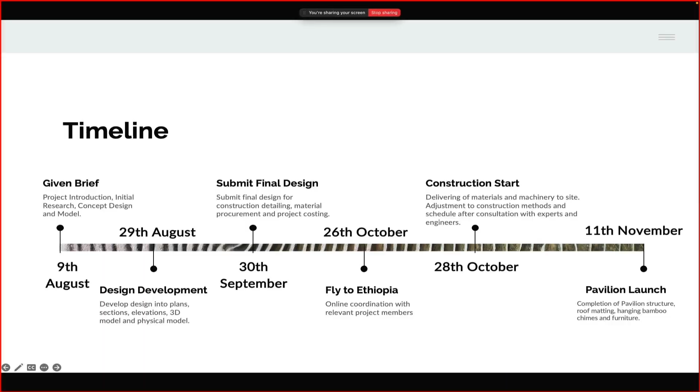I will now walk you through the timeline. It all begins on August 9, 2024, when we received the brief from Mian. Honestly, it felt like someone handed us a hot potato on a very hot summer, if anyone can remember summer of last year. Fast forward to the end of September, the design was finalized, and by October 26 we were on a plane to Ethiopia.

Finally, on November 11, our pavilion proudly stood tall, woven with ropes, bamboo, and the power of friendship. Not really, it's more about the beauty of collaborations. We did enjoy the hot potato though.

In summary, we took 1 month of design development, 1 month of technical designs, 1 month of procurement, and 2 weeks of construction.

Now let's take a moment to travel through the hills of Addis Ababa, Ethiopia, mentally of course - I know it's summer. Welcome to Entoto Park, a park with stunning natural beauty, cultural richness, and now, thanks to a collaboration between two countries, a new pavilion that celebrates connection, local craft, culture, and creativity stands on its ground.

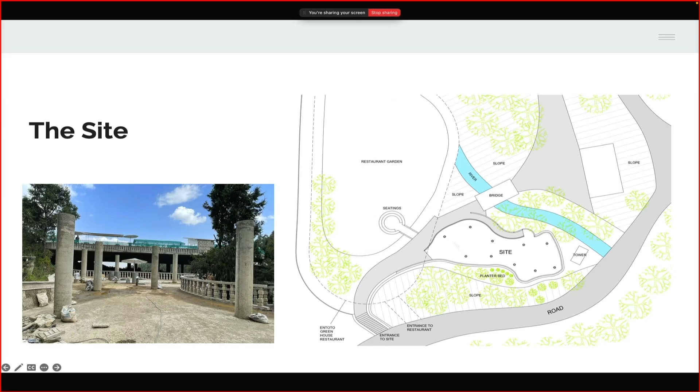Throughout the design stages, technical detailing, procurement, and construction, the 6 students from EIABC were our eyes, ears, and mouth for this project. They were the bridge between us and the local craftsmen in Ethiopia. Now I'll let Austin talk on the designing stages of our project.

Hi. So, moving on to the design stage of the project, we were presented with a unique challenge. While we had freedom to almost design anything, there was one strict condition: we had to build entirely out of natural materials. This immediately shaped every design decision from the start.

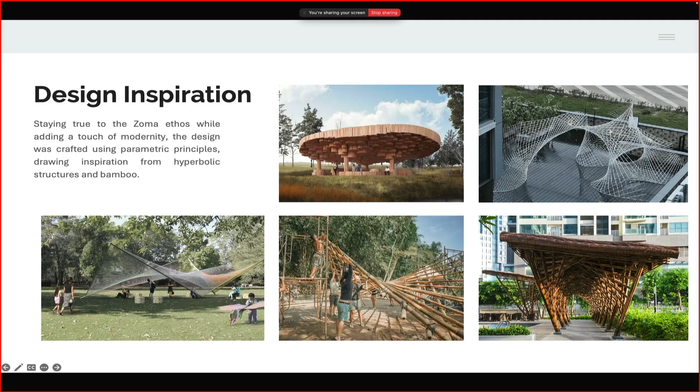At the heart of this project was the desire to create something that could merge Zoma's ethos of craft, community, and material honesty with a contemporary design. We wanted a design that would represent fusion, an amalgamation of modern architectural methods with Ethiopian vernacularism. This led us directly to the material of our choice: bamboo.

Why bamboo? Because it's highly versatile. It's linear yet flexible. It has excellent tensile strength. It's lightweight, rapidly renewable, and naturally sustainable. Perhaps more importantly, Ethiopia is one of the world's largest producers of bamboo. By using bamboo, we not only responded to its structural advantages, but also highlighted Ethiopia's emerging bamboo industry, bringing attention to its local and global potential.

Moving on to our concept design. With bamboo as our primary material, we needed a form that could fully exploit its natural strength while also offering spatial richness. We turned to parametric design using Grasshopper to explore a wide range of possibilities. Parametric tools allowed us to rapidly generate and test complex geometries, adjusting parameters like curvature, span, and beam orientation.

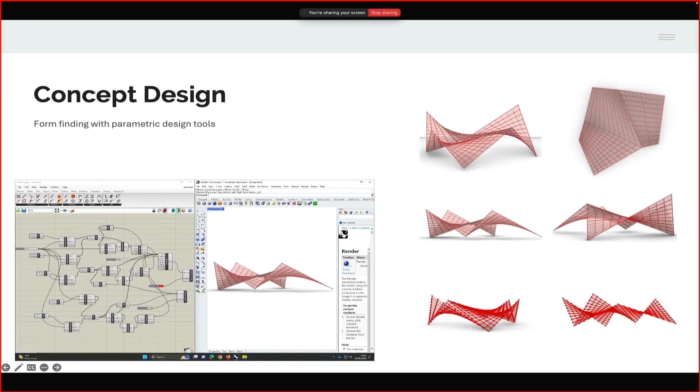We were particularly drawn to hyperbolic paraboloid geometries. The reason for this is simple: hyperbolic surfaces allow you to create flowing organic curves using purely straight linear members, perfectly suited for the structural nature of the bamboo. At the same time, these geometries offered inherent structural efficiency. Loads could be distributed smoothly across the members. Openings could vary in scale and proportion, allowing light and air to filter through the pavilion. In short, we could create an immersive, expressive, and visually dynamic structure while maintaining simplicity in fabrication.

Of course, design on screen is very different from design in reality. We spent several weeks iterating, bouncing between digital simulation and physical models. Building prototypes became a critical part of testing how these geometries would have been transformed into actual materials. These digital models gave us precision and control over form, but the physical tests immediately revealed material realities.

In Grasshopper, every member is perfectly straight, every joint perfectly aligned. In reality, bamboo is far less predictable. No two poles are identical. There are always variations in diameter, curvature, straightness, and even texture. And while this variability gives bamboo its character, it also demands flexibility in construction. So even as we refined our digital models, we knew from the beginning the model would serve only as a guiding framework, but not a rigid set of instructions.

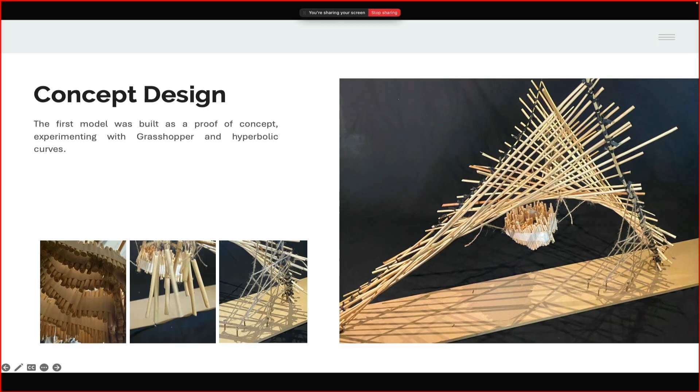Moving on to our further design processes. As we pushed further into the design, it became very clear that achieving a truly freestanding structure held only by rope tension was not going to be possible. The digital simulations could take us only so far, and that's when we recognized we needed expert guidance.

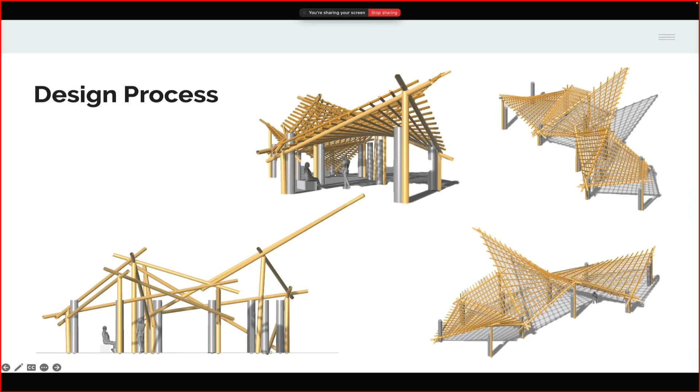We consulted with Dr. Hector from UWE. He's one of the world's foremost bamboo specialists who brought deep knowledge on how bamboo performs in real-world structural conditions. Through these consultations, we identified several key areas of structural vulnerability in our design. With this input, we refined the system, adding stabilizing elements where necessary, while still preserving the light and open character we aimed for.

The site itself played a major role in how the design evolved. Located on the sloping hills of Entoto Park, the terrain presented both opportunities and challenges. We carefully studied the topography to ensure that the pavilion not only integrated with the landscape, but also remained structurally viable. The varying heights of the hyperbolic surfaces were adjusted to negotiate with the slope while maintaining stability and visibility. These subtle vertical shifts allowed the structure to respond organically to the terrain while preserving its intended fluidity.

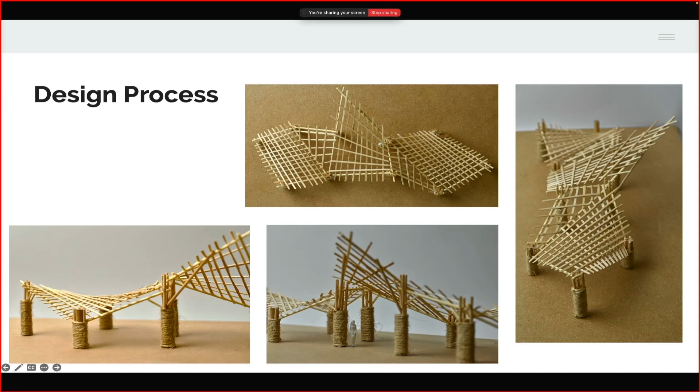One of our most ambitious design features was the 8-meter cantilever, a visually dramatic projection that created a sense of openness and an outward reach. But as we moved closer to realizing the design, the particular difficulties of constructing such a long cantilever without prefabrication, heavy machinery, or precise factory-level fabrication became very clear that it's not possible. So we decided to adapt.

We developed what we called a faux cantilever, or a fake cantilever. By making the beam directly above one of the existing columns, we maintained the visual illusion of a cantilever while safely transferring the load directly into the column. The existing concrete columns actually became critical structural assets for us. Rather than treating them as obstacles, we incorporated them by design as anchoring points for our structure.

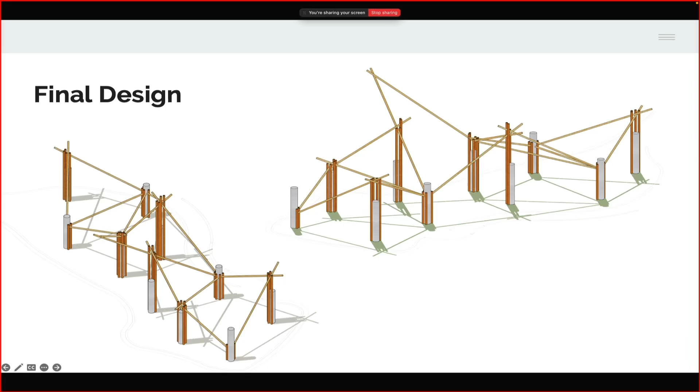Now let's move on to the technical design of our project. The primary form established, we turned our focus onto detailing out the connections. Some columns supported simple beam intersections, one or two bamboo members crossing at a single point. Others involved much more complex stacking, with multiple beams converging at different angles, all tied together. Every joint had to be structurally considered to ensure structural integrity, ease of assembly, and tolerance to inevitable variability in bamboo size and shape. We also had to consider that winds were going to be really strong, because we were building at an altitude of 2,600 meters above sea level.

What you see at the end over there are the cantilever beams where we decided to break it right above the columns. With the stacking, it had to be made perfect, otherwise the structure was going to fail. Moving on to the next one.

With the primary form established, while we were deeply committed to the traditional hand-built approach, there were moments where we needed to integrate modern techniques to ensure accuracy and safety. During the assembly, we used C-clamps, threaded bars, and ratchet straps. These are diagrams created by Charles, which explained how we were going to construct them on site. Everything was done prior to the project, before we arrived in Ethiopia.

These tools allowed us to adjust the tension in members before finalizing the connections with the rope. Once aligned, we applied traditional rope wrapping techniques, as seen over here and here, maintaining the craftsmanship at the heart of the pavilion.

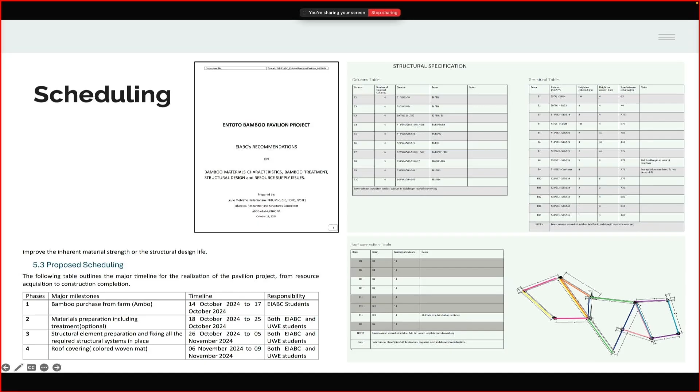Together with the EIABC students, we began to survey the market for the pricing and stock of the materials needed for the construction. In total, we had calculated an estimated number of 57 bamboo mats, 90 bolts, 90 nuts, 90 washers, 150 C brackets, 150 pieces of 7-meter bamboo, and 4,000 meters of rope, totaling up to 140,200 birr, or just 750 pounds.

Did you get more anxious as the numbers got bigger? We definitely did. So maybe the biggest amount in this project is the number of emails.

There were plans to treat the bamboos, but unfortunately, due to time constraints, we had to work with untreated ones. Luckily, a new pavilion is set to be rebuilt and redesigned every 6 months on that site. Furthermore, the lifespan of untreated bamboo lasts up to a few months, and maximum up to a few years, depending on the environment.

I will now stop with the technical details and pass over to Charles so that he can show you the beautiful scenic views we had, and pictures of us working very hard during the construction.

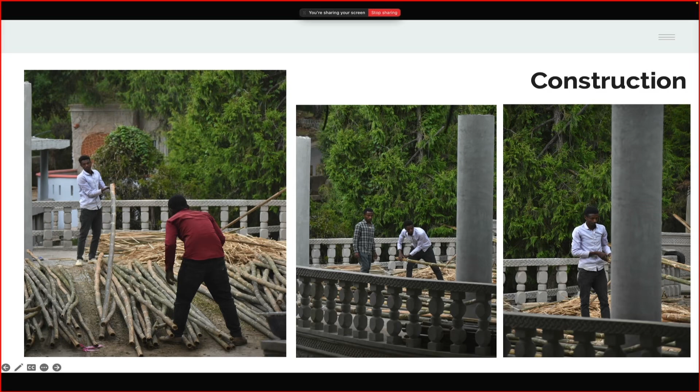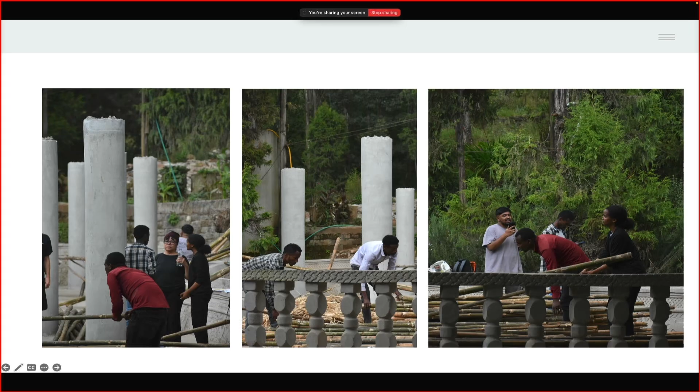Here's where the construction began. When we arrived, it was honestly a bit shocking—we expected the materials from the procurement list to be ready, but instead we were greeted by piles of untreated bamboo and not much else. The first three days were rough, with uncertainty, chaos, language barriers, and a lot of disagreements. At one point, it felt impossible to believe that we could build anything in time.

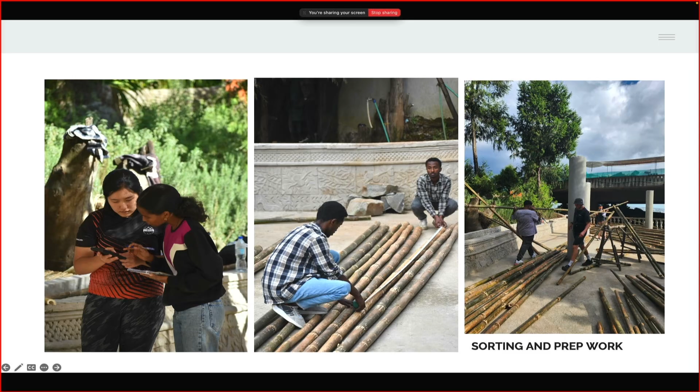But eventually we pulled ourselves together. We sorted and trimmed the bamboo by size, started planning and sequencing the division of tasks, and focused on what could be done at that particular moment.

One of the biggest challenges was communication. The bamboo specialists, seen in the first picture, didn't speak English at all, and the local students who helped translate weren't always on site. Here you can see them showing us how to scrape off the mold to help preserve the bamboo, and there's Mian helping us clean as well.

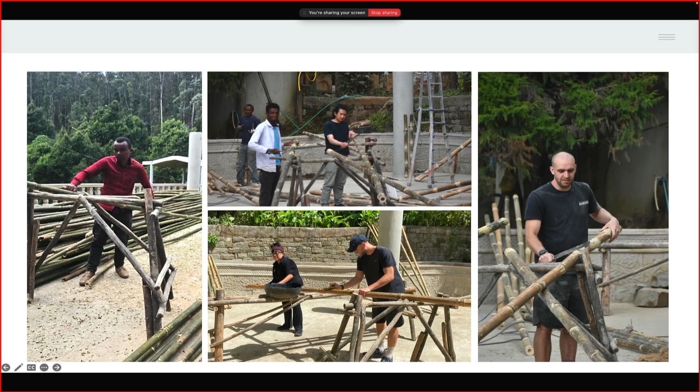Our initial plan was to raise all the bamboo first and add beams, but with the material delay and some parts missing, we adapted. We decided to build one hyperbolic module at a time. Also, instead of screwing the bamboo directly into the columns as shown previously, we used C-brackets to support the members—that's the only thing we had at that moment.

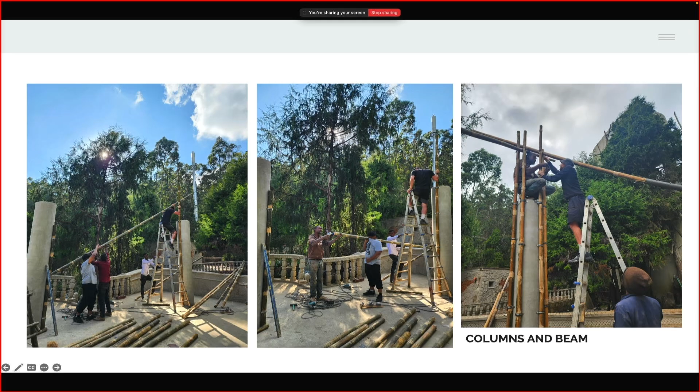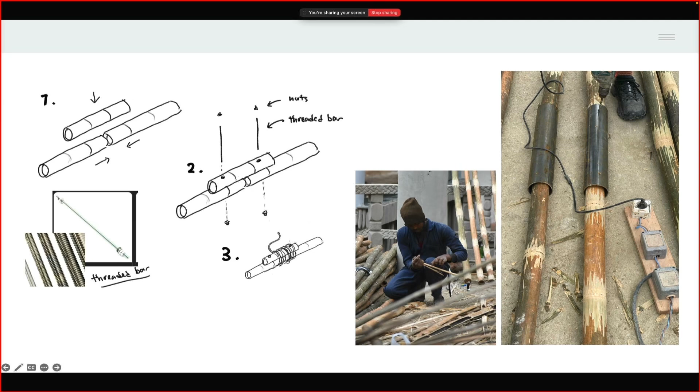This was one of those moments where different perspectives came into play. Our design aimed to be as sustainable as possible—we suggested extending the bamboo by joining shorter pieces together, especially when the full length wasn't available. But the engineers there had a different approach in mind and recommended using hollow core steel instead. As you can see in the last picture, even after securing it with a threaded bar, there were still some gaps, so the bamboo specialists tried to bridge those by slotting in bamboo picks to fill the spaces in between.

Honestly, we weren't really confident at the time, but when the longest beam finally went up and held, that changed the mood completely. It was our first hyperbolic structure, but at that time it was just the primary structure—I think that photo was taken around day 6 or 7, and completing the pavilion still felt like a mission impossible.

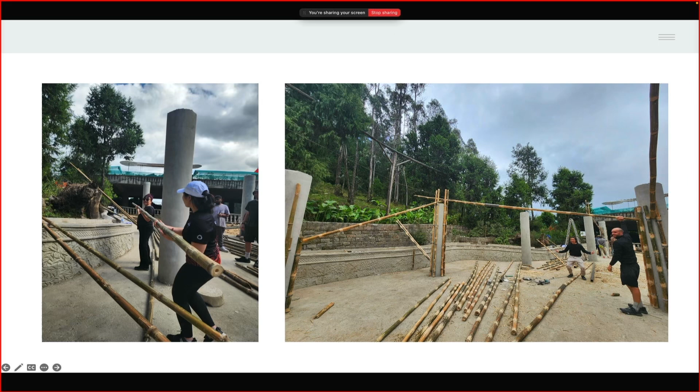Finally, we got the structural engineer to join us on site. We were expecting detailed calculations, technical checks, maybe a spreadsheet or two, but instead he gave the structure a firm shake, kicked at the base slightly, and confidently said, 'It works.'

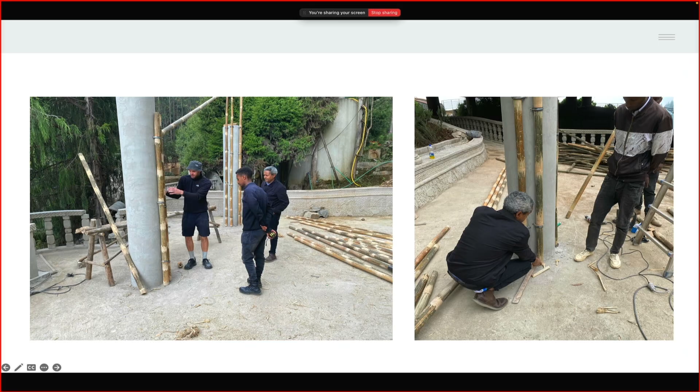We were still a bit anxious about reliability at that point, but the local team seemed very calm and assured. Maybe that's part of working with bamboo—it's just a versatile and unpredictable material. You can't really plan everything; sometimes it's more about trusting the process and experience.

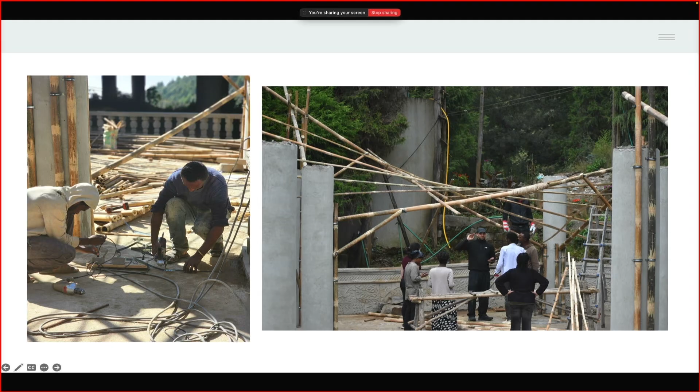Huge thanks to Sammy, the gentleman in blue in the first picture. He was our problem solver, bridging language gaps and suggesting quick fixes, like the time we ran out of C brackets. Instead of waiting 2 to 3 days for new orders, he replaced them with steel strips on the spot. Even with sudden power cuts and heavy rains, Sammy kept carrying us forward.

Once the primary structures were up, we moved on to planning the rafters. As you can see in the photos, the rafters intersect at the center in crisscross patterns, forming a woven surface that follows the hyperbolic geometry of the structure. Because of weight concerns, the design kept evolving on site, so we made adjustments directly there, adapting as we went along to suit the conditions and materials we had.

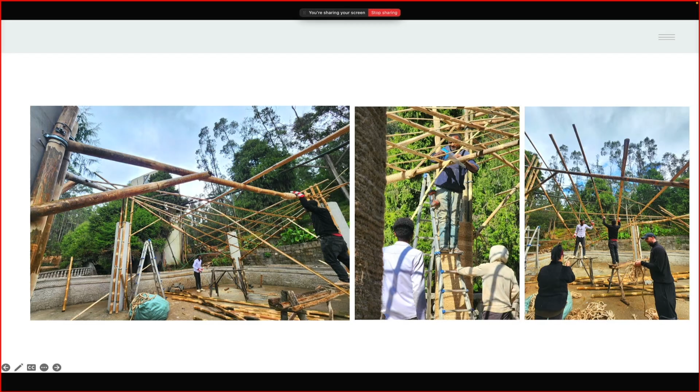We split the bamboo into halves and quarters to make it flexible for weaving. You can see the textures and overlaps in the photos. It was all a hands-on, intricate process.

By day 11 we had the full structure up. Maybe the local team was right - overthinking doesn't really help. But at that time we still didn't have the roofing materials yet, so it was quite tense, but we kept going.

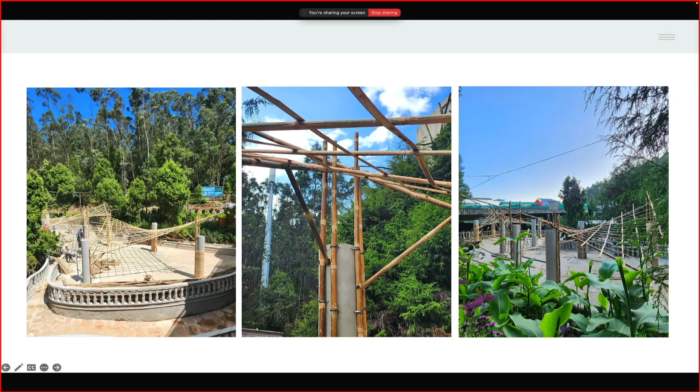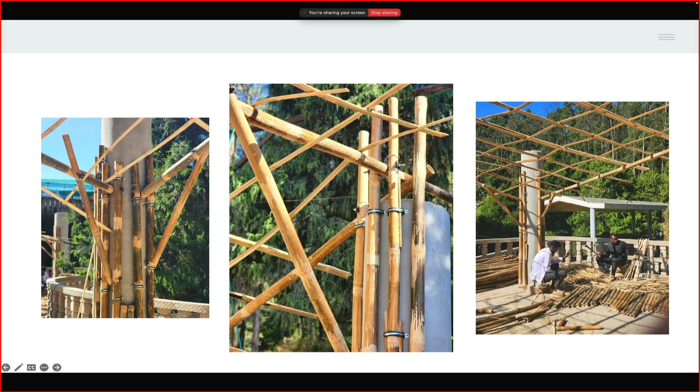We faced some serious technical issues over time, like cracks in the bamboo whenever we drilled too close to the edge. To fix that, Sammy and the engineer suggested wrapping them with steel wire to prevent further splitting. They were also concerned about the cantilever sections, originally planned to be 8 meters in height like Austin said, but we cut it down to 5 meters to make sure Sammy wouldn't do anything crazy.

This is the fun part: covering the cold concrete columns with woven ropes. It took about 4 kilometers of rope - that's a lot. We tried doing it ourselves, but it took a whole day for just half a column, and worse, we left glue stains everywhere. Really big thanks to the professional weavers who made it look effortless with their traditional techniques.

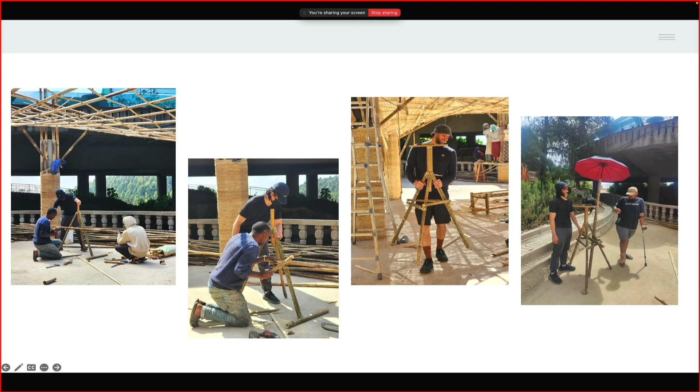We also made ourselves tripods from bamboo poles to record everything. It was nice to step back and capture these moments when we happened to have extra time. We'll show a short video at the end with some of those moments.

So this is day 13. We finally had a bit of breathing room, and we prototyped bamboo chimes, experimenting with different lengths and joints to get the best sounds and form. You can see we have the real things over here - we bought them from Ethiopia by plane.

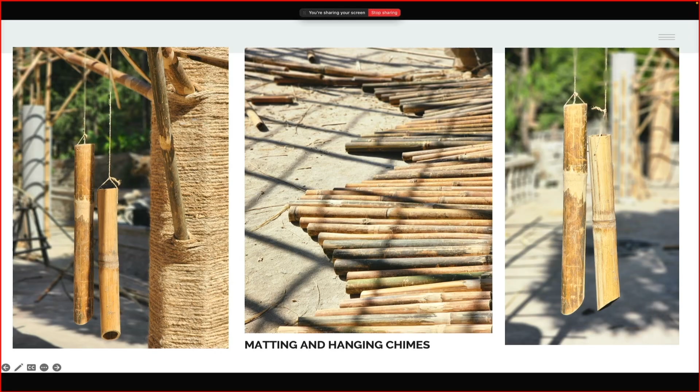And this might be the best part: the chimes were going up, the roofing materials arrived, and we could laugh, breathe, and enjoy the build, and even dance underneath it. We did final inspections, checked all connections, and made sure it was stable and safe - the last step before we could call it complete.

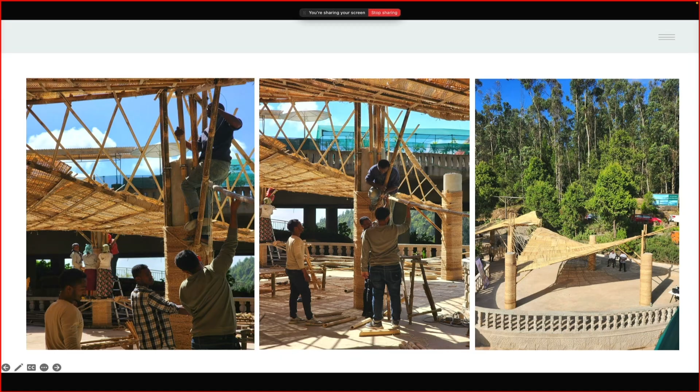Personally, I really love how the shadows from the woven roof fall onto the ground, and how the chimes dance with the wind. It kind of reminds me of some sort of musical rhythm.